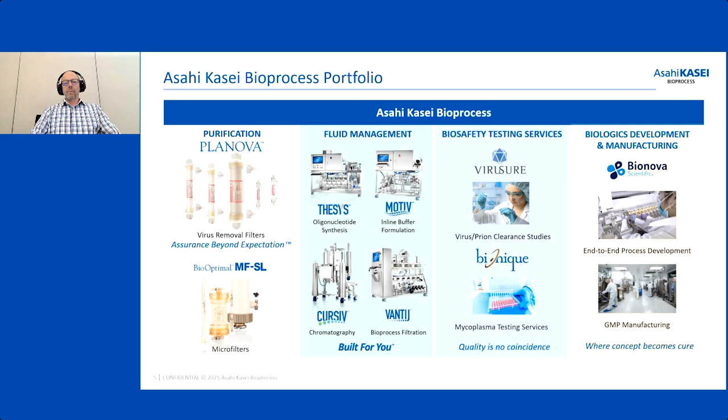AKB has a global presence, not only to produce our products, but also to support our customers in their work. AKB's headquarters are in Glenview, Illinois, just outside of Chicago. This is where our synthesis and purification columns are designed, assembled, and qualified. We also conduct demonstrations, factory acceptance tests, and trainings at our facility.

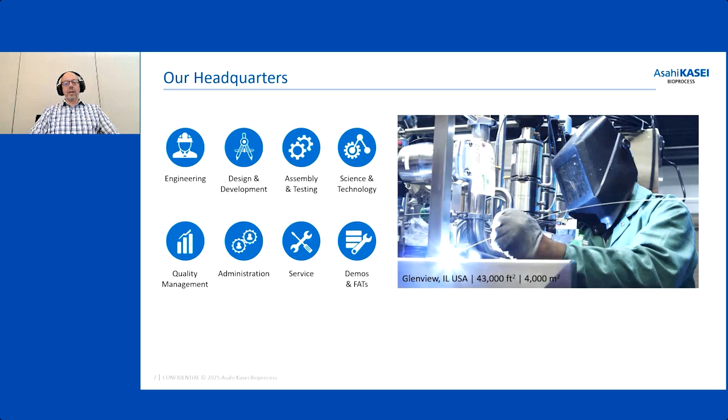Asahi Kasei Bioprocess is committed to quality, which is driven by sustaining our QMS to conform with ISO 9001, maintaining a high level of customer satisfaction, continually improving our quality systems and products, and embodying the company values of sincerity, challenge, creativity, wisdom, curiosity, growth, passion, and responsibility.

AKB is an industry leader in the manufacture of columns used for purification and synthesis, with hundreds of columns of each type out in the world producing medicines patients can trust. Our growth in this industry has been fueled by our remarkable scalability and linear performance comparability for columns ranging in size from 10 centimeters to 100 centimeters in diameter.

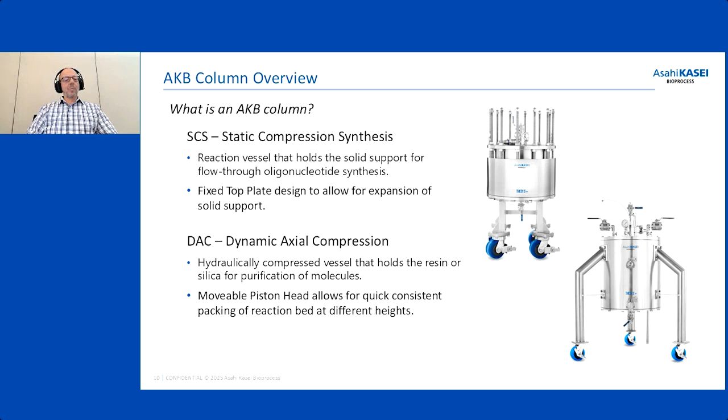Before getting into the importance of seals and O-rings, I want to take a moment to provide a brief overview of AKB columns. We offer a static compression synthesis column and a dynamic axial compression column. The static compression column is a reaction vessel that holds solid support for flow through of oligonucleotide synthesis, with a fixed top plate designed to allow for expansion of the solid support. The dynamic column is a hydraulically compressed vessel that holds resin or silica for purification of molecules. The movable piston head allows for quick, consistent packing of the reaction bed at different heights.

Before I discuss two case studies from AKB customers, let's briefly go over some of the benefits of an AKB column, such as reliable operation, repeatable and scalable performance, illustrated by a broad column installation base all over the world.

I've chosen three customers to quickly highlight who successfully use our columns. The first customer is in the EU and has acquired a fair number of columns in a relatively short period of time. Since 2019, they've built up an install fleet of 18 columns, SCS and DAC, ranging from 15 centimeters to 50 centimeters in diameter. The second AKB customer has an install fleet in the US on the East Coast. They started with 2 SCS 15 columns in 2015 and now have an install fleet of 22 columns of both SCS and DAC columns, ranging in size from 15 to 50 centimeters.

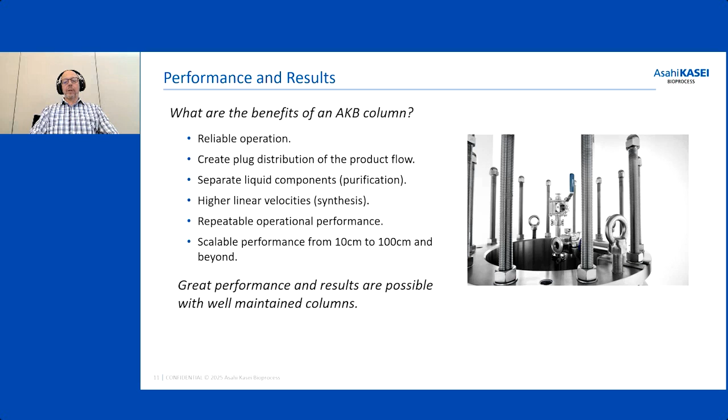A third customer successfully using AKB columns is in the Mountain West of the US. This customer started acquiring our columns in 2006 and has acquired a fleet of over 58 columns, SCS and DAC, ranging from 15 to 100 centimeters. This install base includes multiple columns of the same diameter. These 58 columns and others like them around the world provide great performance reliably with regular maintenance.

For our first case study, we have a European contract development and manufacturing organization. This customer has a significant number of columns acquired over a 10-year period. The customer noticed a performance degradation in their oligonucleotide impurity profile in 2 columns, a 15 centimeter column and a 40 centimeter column.

The customer contacted AKB and the troubleshooting process began. There were calls and emails, questions back and forth, photos from the customers, and AKB reviewed the customer's order history of consumables, the seals and O-rings.

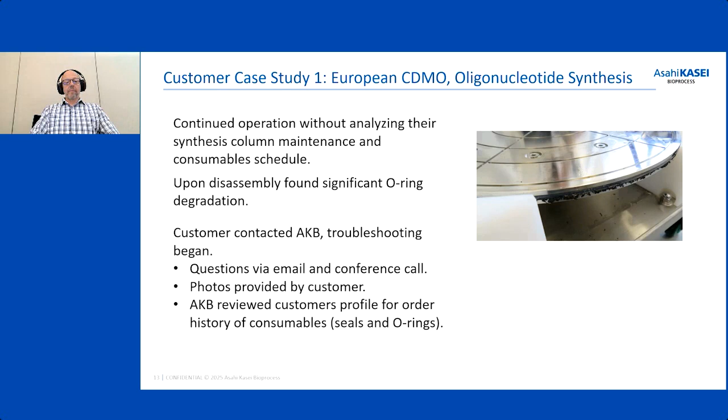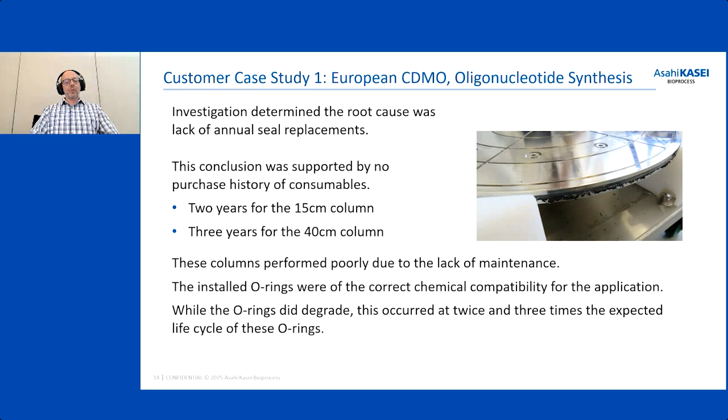Investigation determined that the root cause was a lack of annual seal replacement. These columns performed poorly due to the lack of maintenance. The installed O-rings were of the correct chemical compatibility for the application, but the O-rings did degrade over time. They were used for 2 and 3 times the expected life cycle.

For our second case study, we have an American-based contract development and manufacturing organization. This customer has been purchasing columns from AKB since 2006 and has multiple columns in the same diameters and a wide range of diameters in both synthesis and purification columns.

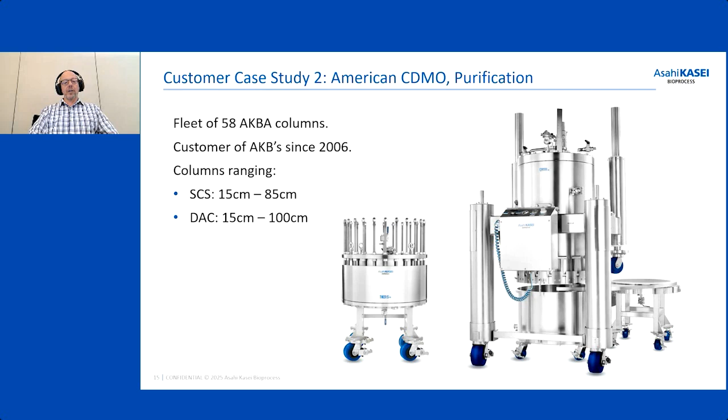This customer called AKB on site for urgent training and support for a number of issues experienced on their purification columns, sizes ranging from 20 centimeters to 35 centimeters.

The customer's representatives communicating with AKB couldn't provide much information before the visit began. There was very little information known about what was being experienced by the operators beyond a dilute product and a loss of hydraulic fluid.

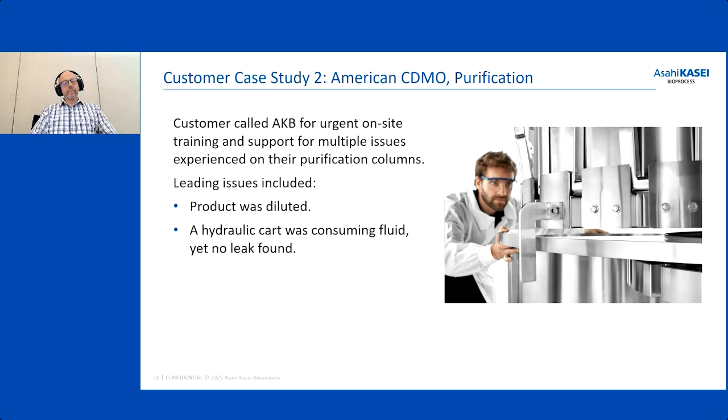AKB column experts arrived at the customer site, held training sessions, conducted Q&As, and commenced with some troubleshooting. One of the operators reported that the hydraulic cart is drinking water.

We thought about this a bit, and I asked the question, where's the liquid going? There was no visible leaks. So the liquid was kind of disappearing. And it occurred to a couple of my colleagues and I, customer, was your product becoming less pure or dilute over time within the batches?

The answer was yes. There's a hydraulic cart that puts pressurized liquid into the hydraulic chamber of the column, and the hydraulic cart had continued to pump hydraulic fluid into the column, but there were no visible leaks. What was determined was that the hydraulic fluid was going past old seals and O-rings and entering the product stream and diluting it.

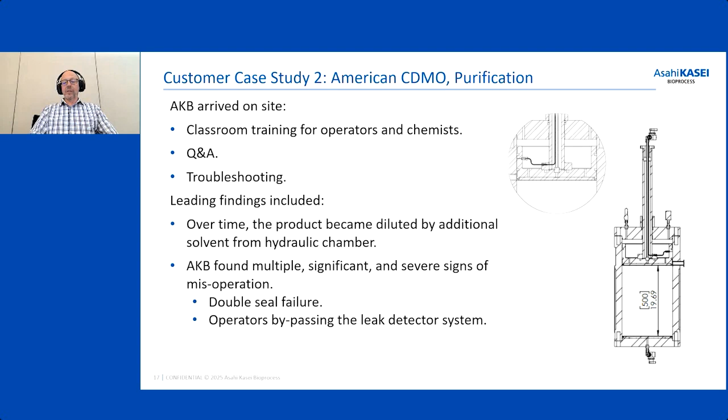There were other multiple significant misoperations, including the lack of maintenance to these columns and a bypassed or capped leak detector system. So I want to explain that in a little more detail.

Our DAC columns have two piston seals, two pressure seals, and a leak detection system. You can see here in this zoom in cutaway of a piston head that there's an upper and lower piston seal, and then in between them, you can see that there's a dark line, and that is a hole in the side of the piston head and tubing that runs to the outside of the column.

The upper piston seal faces the pressure of the hydraulic chamber, and the lower piston seal holds the pressure of the process chamber. If one of those seals begins to fail and the liquid weeps around one of those seals, that liquid will then travel up and out the leak detector, and you have an emission of liquid at the leak detector outlet.

You can analyze pH of that emission liquid, and you will know whether you've got product stream or hydraulic fluid. But the customer had capped the leak detector outlet, so they lost the ability to understand the condition of the piston seals within the column.

So these seals had gone into failure mode. Perhaps I'll draw the conclusion here that the operators didn't understand the purpose of the leak detector system, the leak detector outlet, and the hydraulic fluid didn't go out the leak detector, informing operators of an issue with seals. The hydraulic fluid diluted the product stream.

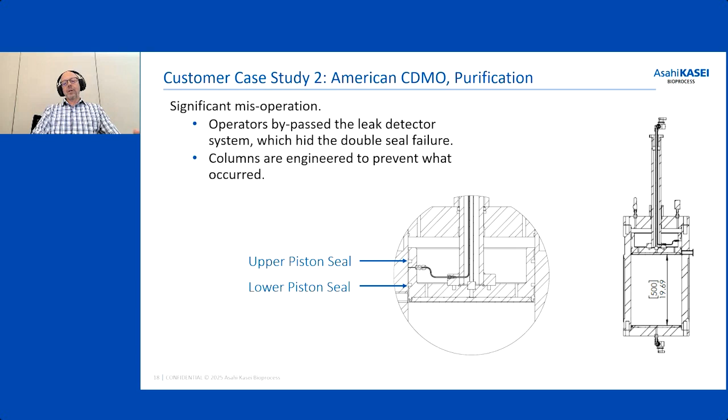AKB columns are engineered to prevent a situation where hydraulic fluid would end up in the product. And in this case, it took severe operational negligence to create this event.

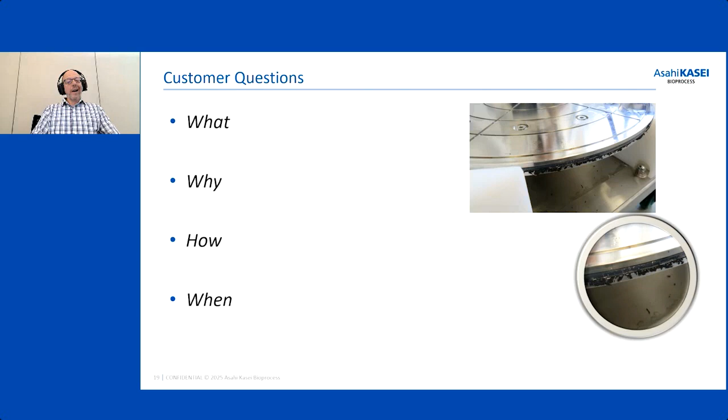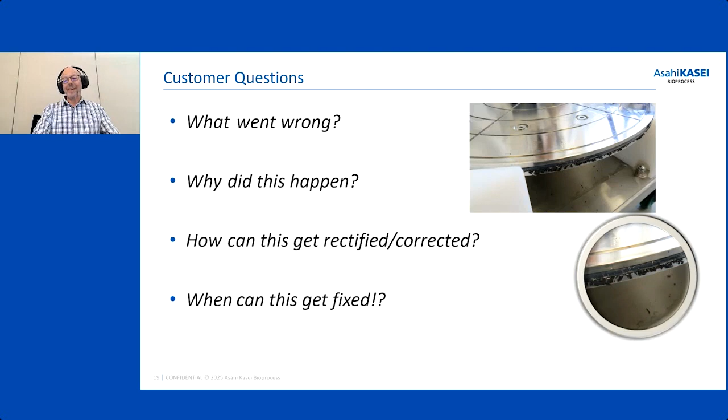So we've had a quick look at a couple of customer case studies, and there's commonality in these situations and in the questions from the customers. What, why, how, when? What went wrong? Why did this happen? How can this get rectified, corrected? And of course, when can this get fixed? The sooner the better, right?

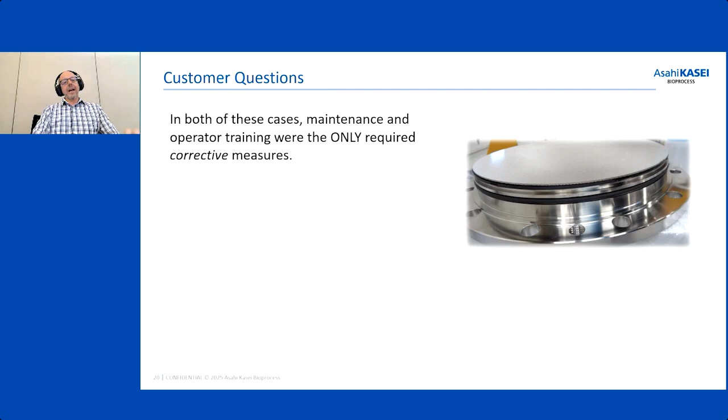In both of these cases, maintenance and operator training were the only required corrective measures. AKB equipment is robust, as illustrated by the extensive worldwide install base of hundreds of columns in both SCS and DAC. Fabricated parts have provided decades of service in several installations. Seals and O-rings do not fail under expected operation.

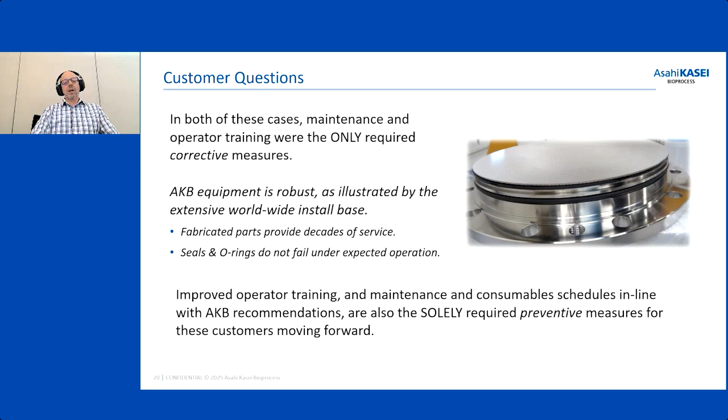Improved operator training and maintenance with consumable schedules in line with AKB recommendations are the solely required preventative measures for these customers moving forward.

A contributing factor to both of these cases is the lack of understanding of the equipment and a lack of regular maintenance. AKB column user manuals include maintenance intervals for normal operation. Column unpacking and frit change require a scraper seal kit. This is considered a consumable, and customers should consider this as part of the batch. Annual disassembly for cleaning and inspection of the fabricated parts requires a column seal kit for regular maintenance activities.

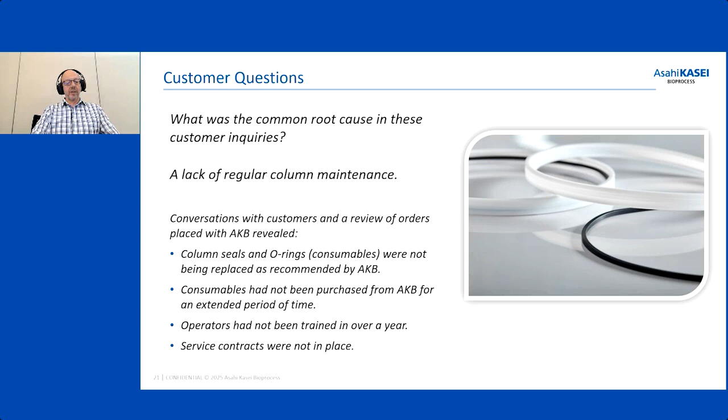Another AKB customer estimated the cost of a completed batch. First, oligos synthesized on a 50 centimeter column. The value, once the synthesis operation is complete, they estimated the value minimally at $1.3 million and as high as $3.4 million for standard sequence product. This is a batch of about 2.5 kilograms of product. This is labor, materials, and consumables. This customer estimated that the batch after the purification step was then worth between $2.9 and $5 million.

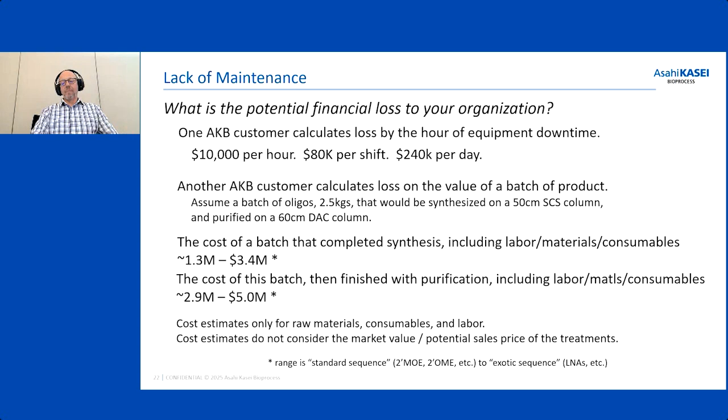These are cost estimates based solely on raw materials, consumables, and labor invested into the product. It doesn't include the costs of market value, potential sales price of the treatments after processing.

In addition to the financial impact directly related to the value of the product, there are other costs, such as lost labor hours. You're going to have quite a bit of engineering and QA staff hours. You're going to have to do an investigation. There's going to be deviation reporting. You're going to have significant impacts to production schedules.

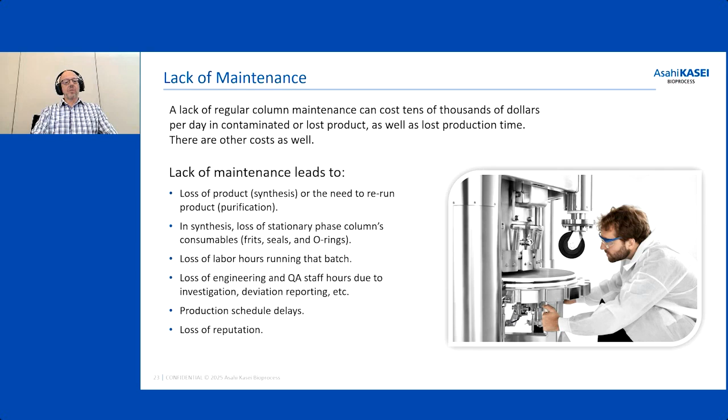When the line goes down, all the scheduling delay cascades throughout your production schedule. And CMOs, they have customers and they're providing product that has to be delivered on time. So delayed deliveries lead to loss of reputation.

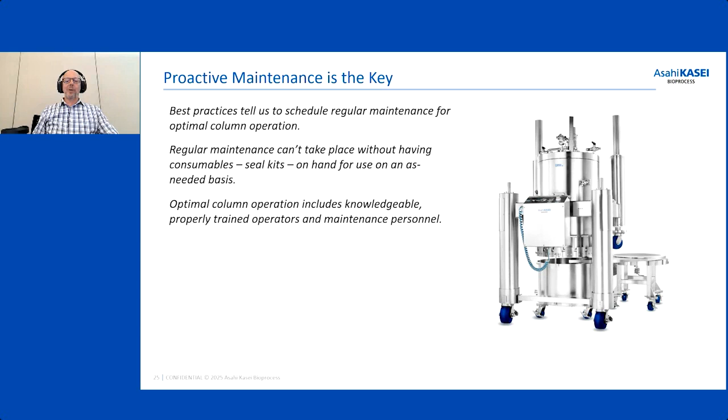Let's talk about some actionable maintenance strategies for robust column operations. Best practices tell us to schedule regular maintenance for optimal column operations. There's 2 kinds of maintenance events in my experience, planned and unplanned. Many people refer to unplanned maintenance as emergency maintenance or repair work, and there are often delays with this type of activity.

Delays from unknowns, lack of preparedness. Are the consumables on hand? Is the staff with the skills available to perform the maintenance? Is the space available to disassemble the column? Are the tools at hand and ready to go?

There's a tried and true motto: be prepared. Have appropriate consumables on hand at all times. Train your personnel. Consider service contracts so that critically important maintenance can be conducted by professional column technicians. AKB can help your organization address all these issues.

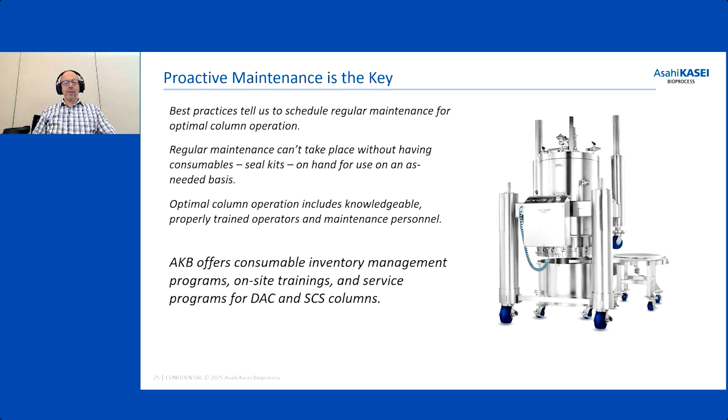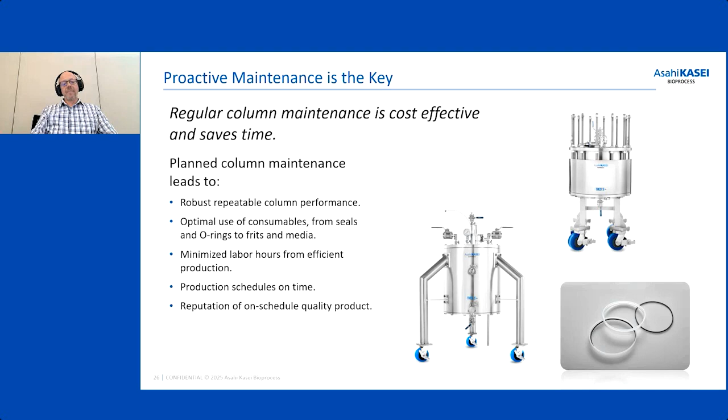Regular column maintenance is cost-effective and saves time. Planned column maintenance leads to robust, repeatable column performance, optimal use of consumables, minimal labor hours, less disruptions, production schedules are on time, and reputation of on-schedule quality product delivered to your customers.

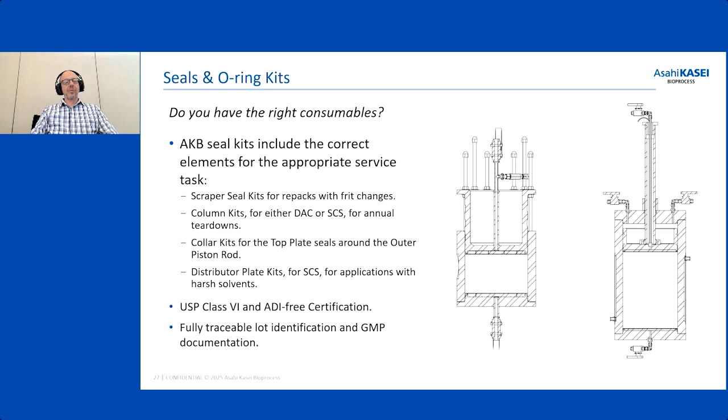Consumables supplied by AKB are organized in kits to make procurement, inventory, and installation as easy as possible. AKB works closely with its partner vendors to not only ensure quality, but also traceability and robust documentation of the seal kits. Each AKB column is delivered with a GMP turnover package. AKB supplied consumables meets those same standards.

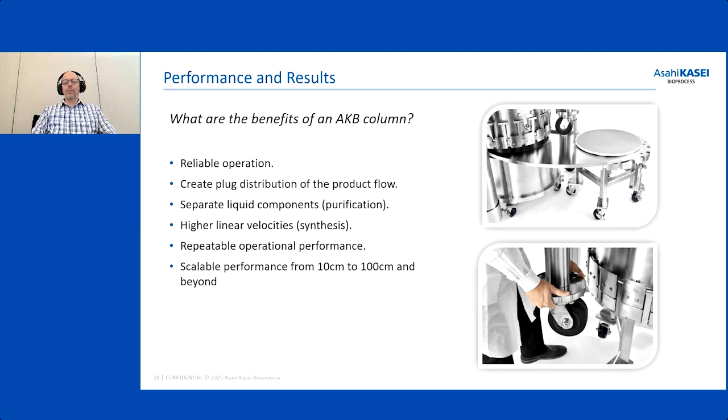If this slide looks familiar, it should. This was slide 11 earlier in the presentation. All of these points are very important. Users of AKB columns expect these benefits here. How do we achieve these benefits consistently? By properly maintaining the column and training personnel.

Column maintenance is a unique task. It's not always a difficult task, yet if personnel are unfamiliar with the equipment, maintenance activities can seem daunting. AKB can help your organization save time and money regarding column operation and maintenance. AKB has the experience and expertise to help your organization. AKB is your trusted advisor to help your organization have successful operations.

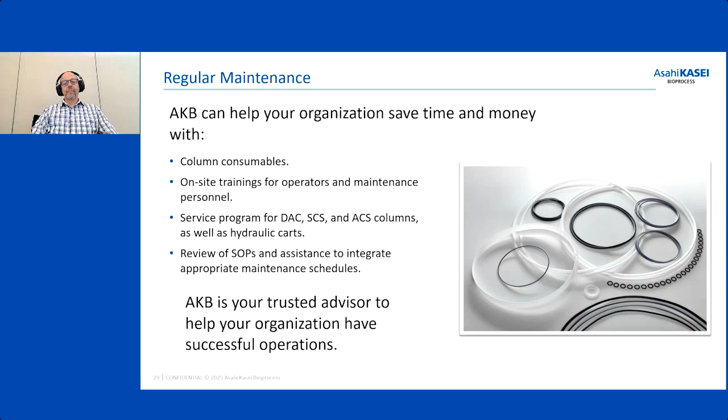Last couple of slides. I promise I'm almost done. Let me summarize with some takeaways.

There is value with having an emphasis on planned column maintenance, and not just on your columns. Other equipment at your facility, and even equipment at your home. AKB understands maintenance can be a challenge, and AKB can help your organization with these activities.

I tend to think of myself as a mechanic. Thanks to my father, who was an engineer, I grew up with a wrench in my hand.

As far back as I can remember, my father performed all the preventative maintenance on all the equipment around our home—the appliances, the furnace, bicycles, the cars, the lawnmower. He taught me to change oil on the family car when I was about 7 or 8 years old.

I remember a TV commercial from that time for Fram oil filters. At the end of the commercial, a mechanic would say, 'You can pay me now or you can pay me later,' referring to an inexpensive oil change now versus deferring maintenance and paying a lot for a new engine later. While preparing for this presentation, I found something I had forgotten: another version of this advertisement. Pay a little now instead of a lot later.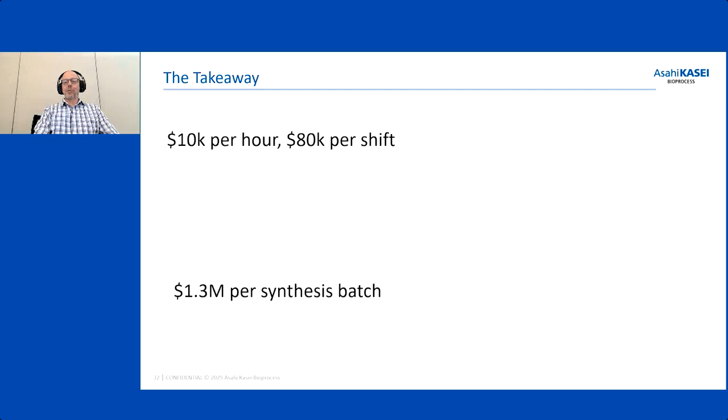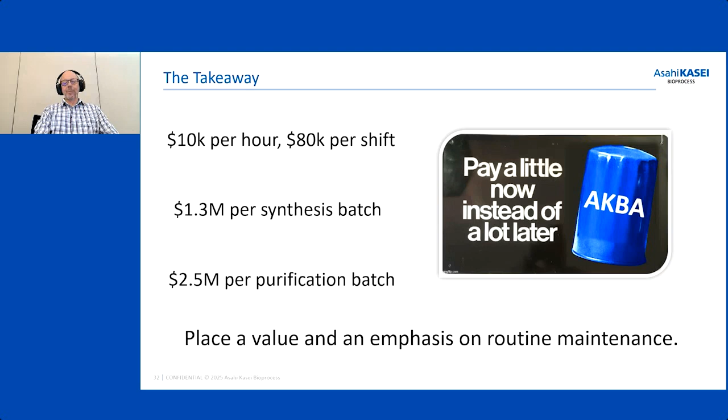You can pay a little now, have consumables on hand, train your personnel, and have service contracts. Or you can pay a lot later in downtime and lost product. Place a value and an emphasis on routine maintenance. Thank you for your attention.